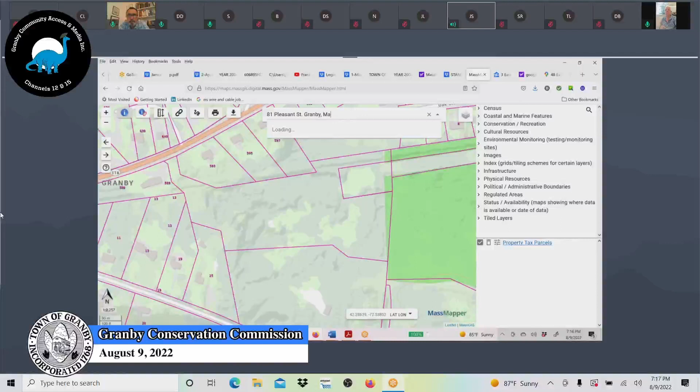Is there a plan that has been submitted to the building inspector that we could look at to make sure it's the same as what we were looking at before? Come on, is there a plan? I'm not sure if he has one or not. I have one in the truck, the site plan that I showed you.

Yeah, I think there was a construction, there was an architectural concept plan for the garage. But I didn't see any site plan of any consequence. Come on, well, this is here, yeah, basically. That's fine, that's fine, Dave. That's fine, okay. Yeah. No.

So Alan has an architectural site plan in his truck. I've seen it, it's pretty limited as far as there's no topography shown on it. It does show the building, does show a schematic of sort of a gravelly parking area, sort of a circle, and a swale that really aren't detailed, but again, it's from an architect. So that's the piece. More than willing to bring that in to let the commission look at it, but I don't know if that would answer Dave's questions.

There's no wetlands shown on this plan. Yeah, I'm trusting Dave and Amanda want to see a little more detailed site plan or site sketch. Is that not true, Amanda? Yeah.

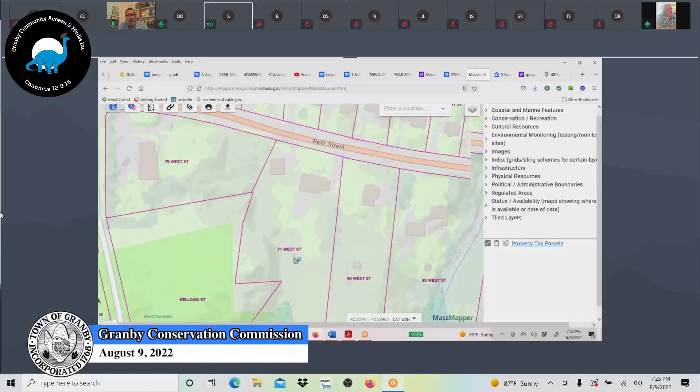I feel like it's a no-brainer because it's a repair. But it is our jurisdiction. I would argue based on 1003-3 that it wouldn't even require an RDA.

I would be willing to let this one go without a permit because it's presumptively approved through the wetlands reg, via Title 5 reg. That's my feeling on this. But if you guys want to have them go through an RDA process, that would be fine. But I call your attention to 1003 paragraph 3, presumptions regarding Title 5 designed leach fields.

But that's the purpose of the RDA, that they would just bring that to us so that we didn't do this twice. You know what I mean? Like they should have just had an RDA to begin with. Well, you can make that argument. Bob, would you be good to do an RDA on this?

Actually, I would not be, unfortunately. The property owner, as I understand it, is going to have difficulty affording the expense to install this as it is. Ward Smith, my understanding, is out like 3 months to do an RDA. There's virtually, I was asked today by another engineer, who can we get to do wetlands? And the bucket is empty.

So we were hoping to get this in with the understanding that it is greater than 50 feet, as Title V states. Granby supersedes that by saying 100 feet from wetlands. That's for new construction. Dave, do you have access to Bob's septic design in a PDF format that you can put up on the screen, please?

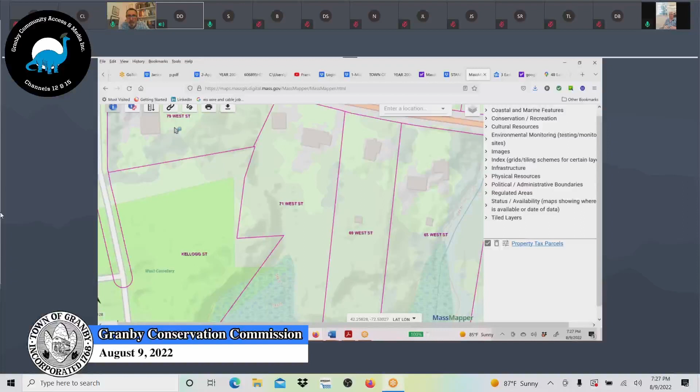Oh, no, I don't, Bill. Has that been pushed out? Bob, have you sent it? I sent that to Kathy on Tuesday evening last week, or Wednesday morning. All right, let me look. We'll have to do a search then.

The RDA form is so simple that applicants should be able to fill those out themselves. They literally just have to say that it's 53 feet off the wetland, it's replacement. It's more that it should have been done beforehand, because it is silly to have you guys come back.

Well, let me ask you this, Amanda. Would you be willing to let the RDA go through without a plan and map of the site? I would just use a GIS map and draw over it, because I could throw it together right now. The only thing about RDAs is that there's the public notification requirement.

Well, see, that's the point. That's a month delay right there. But ideally, maybe we could let this one slide, I guess, but ideally we would want people to just do the process in the first place. Well, why don't we get Bob's septic design up on screen so everybody can see it.

I don't have it. All right, I think I might have it in my Board of Health file, so just give me a minute. Maybe I can find that and send it to you, so just stand by. I need about 5 computers.

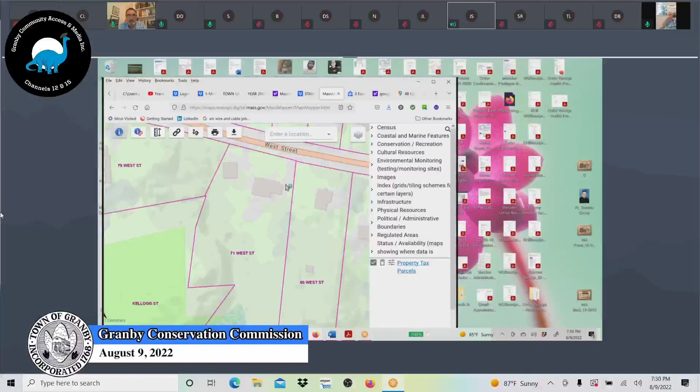Yeah, but again, I'm trying to. Bob, could you send me that plan electronically right now? Is that possible? Yeah, Bill, what's your email? Just send it to my private one. It's n1cq@comcast.net. N1CQ, yeah, at Comcast, yes, .net. And then once I get that, I'll send it to Dave and Dave can put it up on the screen.

Okay, it's on its way. Okay, thank you. Okay, excellent, Bob, thank you. I'm gonna send this to Dave now.

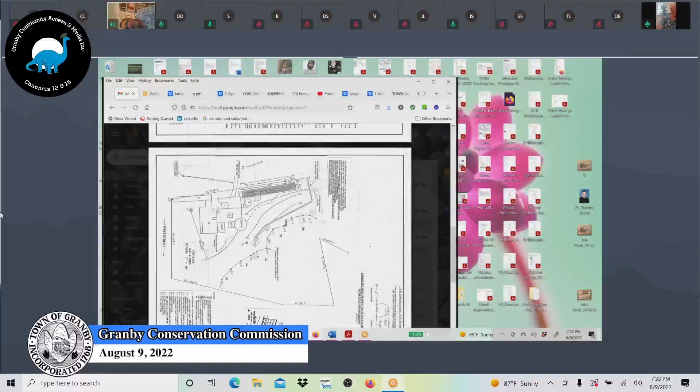And as I had explained at the Board of Health meeting, we've got an iron pipe property pin right at the property line where the leaching facility is going.

In fact, if you look at this design, there's absolutely no other location for it, because if you shift it to the north, then you're encroaching on the well. So you don't want to encroach on the well. And again, you can't go any further to the west because that reduces the separation off the wetland. And if you go to the east, you're on the neighbor's land. So you're kind of boxed in there.

Yeah, honestly, this plan would have been perfect to go with the RDA. But I mean, yeah, whatever we do, I think it's fine.

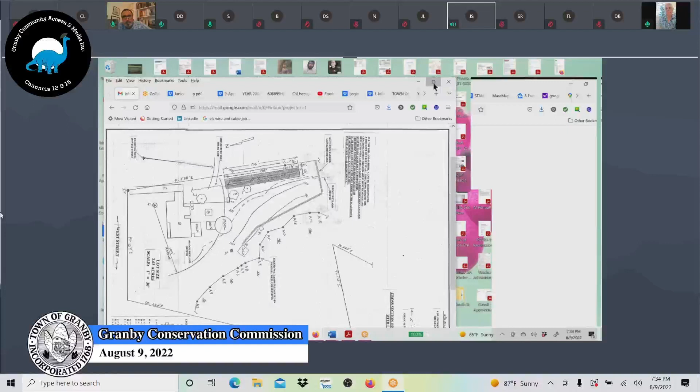It makes sense. Now, Janice, based on your reading of that exception, does it or does it not necessarily require an RDA to accompany that? I don't think it actually says, other than it says that the presumption is considered overcome. The setback distance isn't necessary if it's an older system prior to the effective date of the regs, and there's no alternative location.

Well, again, my personal opinion is I think there's nothing to be gained by doing a formal RDA except getting a $150 fee from the applicant and taking another 30 days to get this accomplished. So, with due respect to what Amanda's saying, which is totally correct, but I think given this scenario, I think it might not be a bad idea to simply approve as Bob has submitted this.

Is that a motion, Bill? It is. Is there a second? Dave will second. Discussion? All in favor, I guess? Aye. Opposed?

All right, so we get a permit for the septic system. Bob, you're all set. Bill, do you want to relay that information to whoever's in charge of that? I don't know if the building inspector's in charge of that.

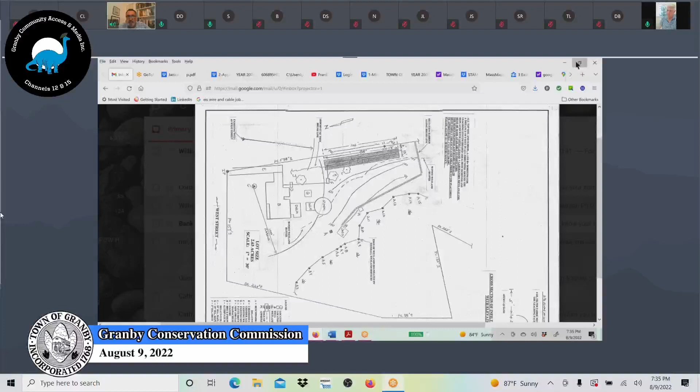Yeah, I'll do so. Again, I don't like to have to do this at this rapid a pace, but again, there's really no other option on this particular site. I think, Janice, write a little note to yourself to do a little further research on the protocol for handling this particular presumption. All right, we're up on 7:30.

Okay. This is Bob Sheehan. I just want to say thank you very much to the commission. I appreciate it, as well as I'm sure once I communicate with the property owner, they will greatly appreciate what you've done. I appreciate it.

Thank you. Give Mr. Scully your best. Thank you. Thank you very much. Good night, all. Bye-bye.

Before we start the public hearings, Mr. Blanchard from 591 Amherst Road came back with his septic plan, I believe. Did you want to hear, look at it real quick? I don't know if there's any issues with this or if this can go fairly quickly. Are we willing to see it, or do you want to go to the public hearings? Are we gonna see it though, Ed? Yes, he brought, he's got a copy here. I can flip the camera around if we get this done in 2 minutes, I guess. See what we're looking at.

I really can't see it. Do you see that, guys? Could you get rid of your screen share so the images show up larger on our screens? Yep, close your screen share if you would.

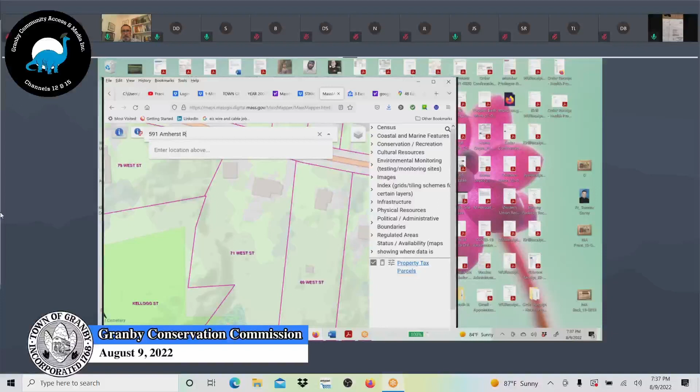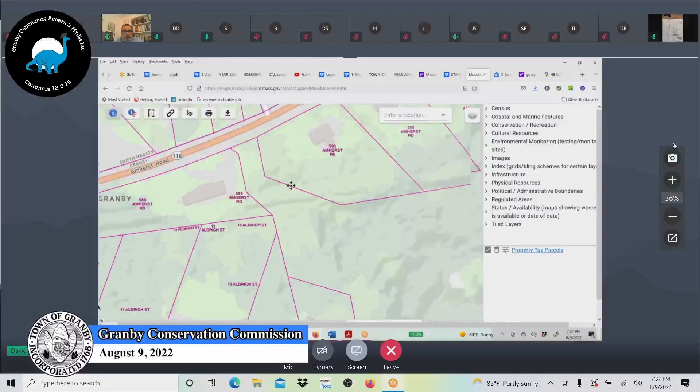Is that what you're looking for, Bill? I'm actually looking for Ed's plan as well. Ed, could you have this gentleman email us that plan? We can't do it over the phone. I'm not seeing an image large enough to even comment on. I think we're gonna have to go through a more normal process. Have him prepare a submission package for next month, please.

You want to hang around till after the public hearings? He can email it to you, Bill, and you can send it out. Janice, could you take care of that? Let Janice handle the logistics on this, please, in terms of getting a copy of the plan. Coordinate with this landowner to get all his documents in order before we start looking at things. Thank you. Do you have his, Janice's, email?

Kevin will get you that information. Okay, Amanda, let's go to public hearings, please.

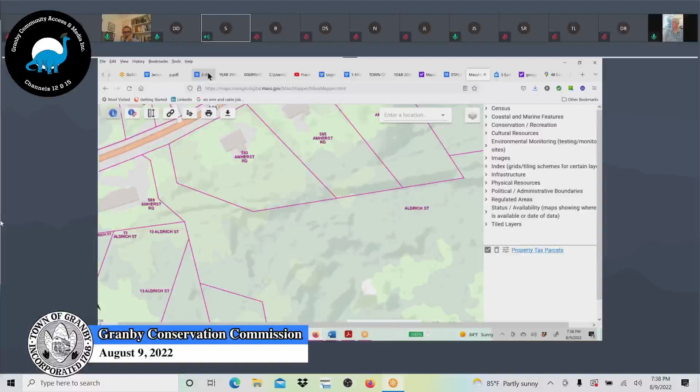So our first hearing scheduled for 7:30 is NOI GCC 2207 number 165-0356, filed by Patricia Leavenworth for Mass DOT, for the proposed Route 202 project intersection improvements at Five Corners and School Street Roundabout, located in the town of Granby.

Patricia, are you here? Do we have a representative from Mass DOT here? So do you, I guess? Mr. Notario, would you be presenting? Nathan?

All right, we're getting some feedback on my end. What I would recommend, Ed, is if there's more than one person there, please have everybody mute their microphone except the person talking, otherwise we're gonna get feedback. So if Bob Notario is going to present, then Ed and everybody else should mute their mic.

Okay, now I don't hear anybody. I think that's Bob Notario. Bob, is that you? We're still getting feedback now. Maybe if Bob uses Ed's device, it was performing pretty well, maybe Bob could just use Ed's device to transmit. Can Bob share his screen? No, he's not going to share his screen.

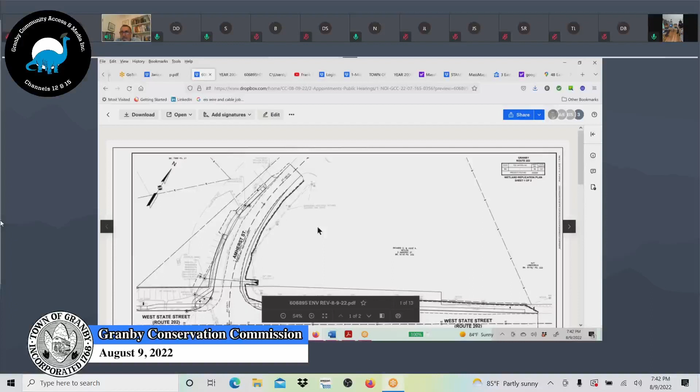I think the key one for wetlands is going to be the 6 or 7 digit number that says ENV revised, I think that's the key one for us. Should I open it now? Yeah, sure. That's it, that's it. Okay, Bob. All right, how's the audio coming in? Perfect, loud and clear.

All right, thanks for having us. My name is Robert Notario from Mass DOT. I'm here with Ethan Minot, one of the designers on the project. We've been talking about this for a while, but we finally arrived at the notice of intent, so thank you very much. I was going to start off this evening with just some basic bulleted points of the resource areas, if that's okay with the commission. Bob, why don't we go back a couple steps and outline it. Up on the screen you'll see what the two projects are, the Five Corners intersection project, and if you look at the very bottom of the plan on the left side of the plan sheet, that's where Cumberland Farms is.

So the wetlands and resource areas in the vicinity of the Five Corners intersection are in the general area. There's a stream to the west of that intersection and a stream to the south, both of which meet Stony Brook, approximately 2,300 feet to the west.

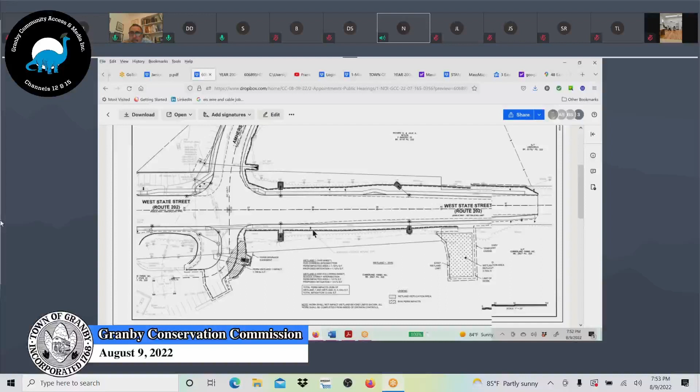Right, so our stormwater outlet - it isn't a direct outlet to the stream or brook, and we're actually pulling it back a few feet. Is that correct? Yeah. So the outlet is on the north side of Route 202, which is the pond side, and the water is flowing north. So if you followed a raindrop and it fell on the roundabout, it discharges out as water flow out our outlet, flowing into the pond side or north side of Route 202, not into the actual flow or stream channel of the brook, which is a cold water fishery resource.

Is it 1 CFS with a 100-year storm? Is it 10 CFS? Is it 0.1 CFS? What's the order of magnitude of the peak flow rate? I don't know the number off the top of my head, but I will get you that number. Again, we are pulling that outlet back several feet - we're going to have stone pipe ends at the outlet there. I'm trying to look at it from increasing the distance between that outlet and the resource area, which would be the pond side, not the brook. And you can see it if you want to look on the plans.

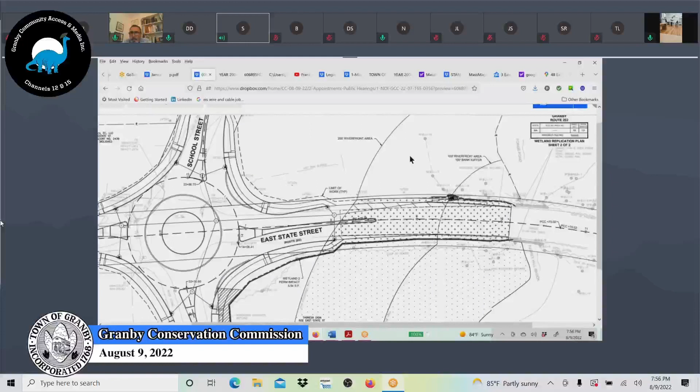I have basic responses to the DEP comments. My intent for the first meeting was to meet live in person and online and discuss the comments as we go. I was fully anticipating having at least a couple of meetings with the commission and a site visit. I'm not trying to rush through and just close out all the comments in one fell swoop.

I'm under the approach that everyone's got an opinion, and I'd like to incorporate as much thought process and get back as much detailed information as I could. I do have responses to those comments, which we can go over depending on what time you have in your agenda. I didn't want to assume how much time we had. And again, I knew we were going to be meeting a couple of times at least. So our approach was to holistically have a healthy discussion with those comments, which I think are pretty well thought out.

I'm glad you're not looking to close it tonight, but I would also be happy to see how DEP responds and if they're satisfied with your responses. I've worked on a couple of their Mass DOT projects and they have been very focused lately on getting all the stormwater stuff right, really nitpicking projects to make sure they're very compliant. So I would love to see their responses when we get there.

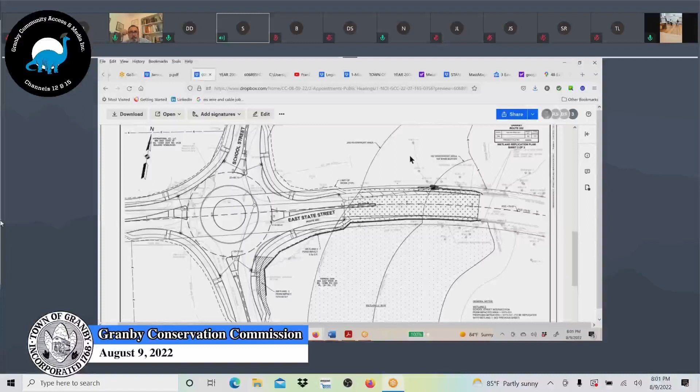and forward us the response by email? Yeah, let's do that. Is that what we're asking for, Amanda? I think that sounds good. I would also like to see the page for the wetland replication, if you have the planting plans and stuff. I don't think that was included in our package. Do you have a forest plan? That's not in this package? The restoration, I didn't see it. We have a planting plan we can share for the wetland replication area.

We also have a basic planting plan for the roundabout. We can't get too crazy in there because it's something we'll have to maintain as well, but we do have planting laid out. We have a certified landscape architect, Andy Schlenker, who's working with us on this project, and he'll be working with us all the way through construction. Bob, are any of these plans in our package that we have currently?

I don't think so. I think it said it was page 64 or something, in one of the notes. That's okay, I don't need it tonight. I don't see it. One good point, if I could, please - who's going to maintain the interior circle of the roundabout? We have them with us here. I can pull them up on the screen, I can email them, I can do pretty much whatever you want.

So Bill, I think I didn't hear your question. You said something about who's maintaining the roundabout plantings. I would imagine that's Mass Highway. This is the classic dilemma with roundabouts - who's going to maintain the interior surface, or are you going to simply pave it? It's Mass Highway District 2's problem. That's their maintenance, that's not Granby DPW. That's going to be Mass Highway.

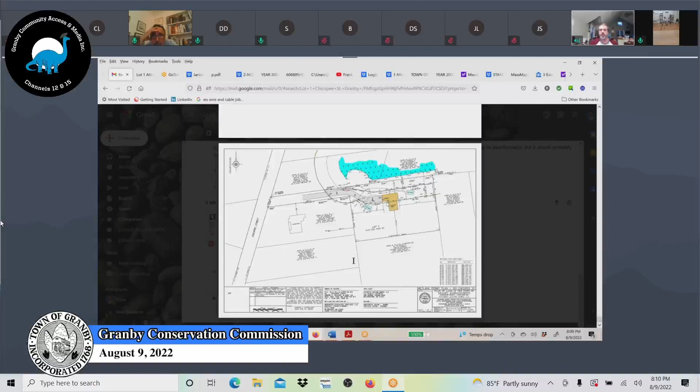Hope the thing's gonna be, oh good, there we go. Yeah, so that blue area up there, that's the wetland located off-site to the north. It's about 10, 11 feet lower in elevation than the site. The site itself is pretty flat.

Due to the configuration of the lot, the driveway kind of has to go through the buffer zone. There's really no way around it to get into the site. So we have the driveway coming in center of the right of way and then swinging out of the buffer zone as soon as we can to get to the house.

We're proposing similar rain garden swales along the edges of the driveway like we did at Maximilian. This time we're putting them on both sides. One will catch the driveway runoff - the driveway will be pitched away from the wetland and then through a vegetated swale into a rain garden. On the north side of the house, we have a similar setup along the new tree line, which would catch roof runoff or yard runoff, putting that into a swale and infiltrating it in a rain garden right there.

The clearing would be 50 feet from the wetland, other than a small area where the driveway doesn't really have any way to get out of the 50-foot buffer, where that red hatching is. That would be a little bit of clearing inside the 50-foot, just for the corner where the driveway is. But we looked at that area in the field - there's really no trees there, just maybe a couple small pines, but no substantial trees right there.

Erosion control, we obviously put along the backside to catch anything. I figured we could talk about tonight what that erosion control could be. We were thinking of using the same wood chip berms, or wood grinding berms I should say - they're not actually chips, they perform better than chips. Steve, put that as an erosion control question.

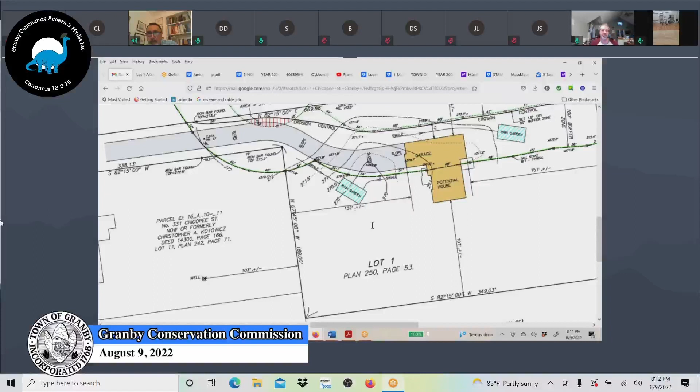So your wetland flag 13 has an elevation of 261.8, call it 262. Are your wetland flags more or less at the same elevation? Pretty much, yeah, total slope. So you're going from 272 to 262, a 10-foot elevation drop in 50 feet. That's pretty much perfectly flat, and then it drops straight down to the wetland.

So where's the break in the slope occur? If you pan the sheet closer to the wetland. Could you unzoom a little bit, please? Where that wetland line is very straight between wetland 7 and 11, the drop off is probably 5 feet back from that. The drop off's not on Mr. Kotowicz's lot. So when you cross the property line, there's an escarpment, a real steep slope at that point.

So the rain garden, are you going to utilize that for the gutters from the house for discharge? I don't think we were proposing that directly. Whatever came off the house would get into that swale and into the rain garden. I got you, that's good. Looks like a good design to me.

Any other comments from anybody else? I had one question looking at this plan. I know this isn't an architectural plan, but the driveway right now is drawn like it's 20 feet wide. Is that actually the width of the paved driveway or the driveway itself? That's what's shown. I don't know ultimately what would get built.

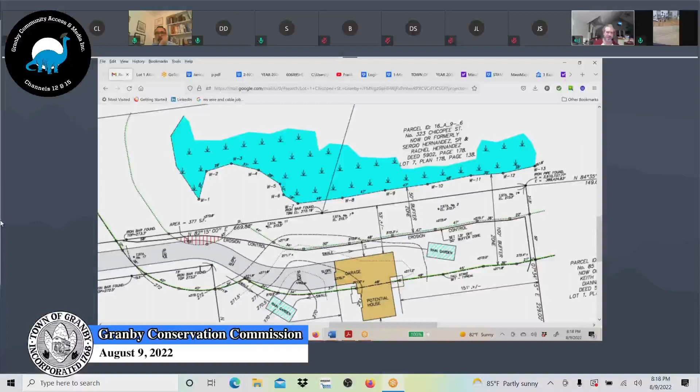Fairly common. Some of the towns that have bylaws have that written into them. I don't know the exact percentage, I'd say usually 15-20% of them that have bylaws have some level of a no-disturb zone, but then they have a variance to get out of it, you have to explain why, but there's a way that you can approve it. By and large, people try to get out of there if at all possible.

Yeah, that's something we might want to consider for future reference. And again, given the fact that there's a variance protocol, it's not going to be a steadfast deal killer for anybody, but I think it's a good protocol for us to at least consider. Thank you, Steve. No problem.

Okay, anyone else? Oh sorry, I was just going to say one of the things to discuss before we end it all is what Steve mentioned about getting approval to use that sort of wood shredding mulch instead of the usual erosion control, just to have that be part of the decision or discussion.

Now, getting back to the driveway, when we write up the specials on this, do you want to limit the width of the driveway so many feet from the house? I realize you want it the width of the garage, but then you'll neck it down, and maybe Alan wants to put in a hammerhead turnaround for the owner. But do you want to limit the absolute width of the driveway for the majority of the driveway going to the street, or permit him to go with a 20 or 25 footer if he wishes?

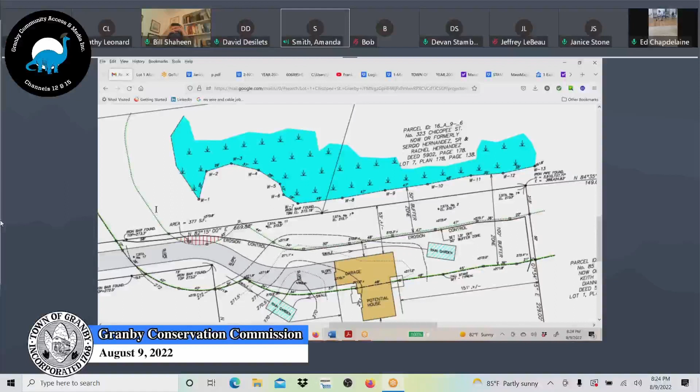Amanda? Yes. Next item, 48 East Street. Yes, so this doesn't have a file number. Is that correct? On the Stamborski one, it does have a number, DEP number 164-0355, filed by Devan Stamborski for the proposed new house and driveway within buffer zone and driveway wetland crossing, with regards to property located at Lot 1 adjacent to 48 East Street and known as Map 5B4 in the town of Granby.

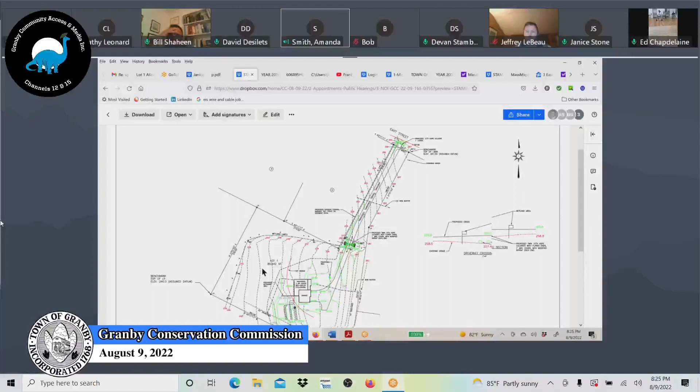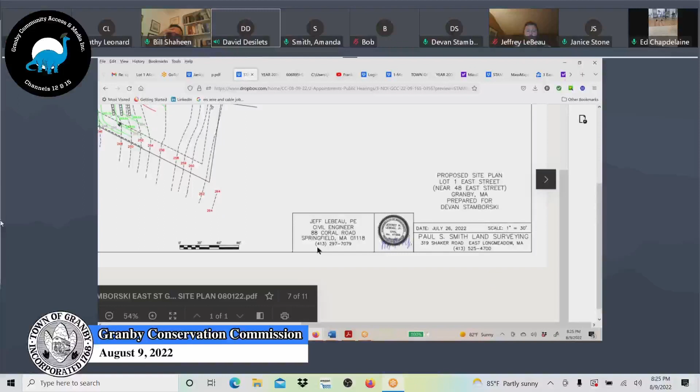Everybody see that okay? I see it. Dave, who's the surveyor and engineer of record, please? It's right here, there are people I really don't know. The civil engineer is Jeff Lebeau from Springfield. And the surveyor is Paul Smith Land Surveying from East Longmeadow. Oh okay, he's been around. Ed, you know Paul Smith, don't you, Ed?

Yeah, I do. Okay, you have a full-size plan? I can't read the reduced copy. I know we have a PDF on screen, but we don't have a full-size drawing in the folder. My eyesight is not good. This is one of the LaFlamme properties that they're selling on East Street.

It's the estate lot right next to 48 East Street, which is a site that Janice and I looked at a while back. They were putting in a swimming pool, I think, Janice. Yeah, and if you remember, it was springtime, and there was a spring. It looked like it was draining an upland wetland. And that's what this culvert is, at the driveway, just at the top of the plan that you can see. So I think you did a very good analysis for them.

I don't know, well, Devan is in the room, so maybe we should let him talk. Yeah, let the applicants present their case. Is this an NOI or an RDA? NOI. Okay, so Devan and Jeff, go ahead please.

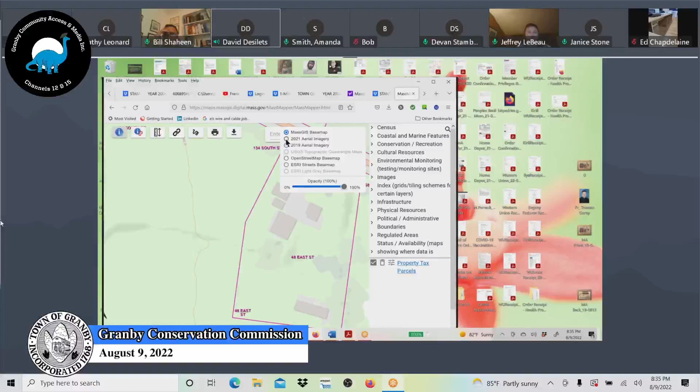That would be good. You could share your screen. Do you have it? I think you have to make me the presenter. It's whoever has the power has to share it.

Yeah, the thing is, I don't know if Kathy lets us bounce the share. She privileges it back and forth, but I lost it before. I gave it to a consultant one time and then they left and we lost it.

Okay, well, Dave, if you could hand that off to Amanda, that would be terrific. I'd love to. So Amanda, or Bill, I have two residents who are direct abutters that are here.

They're here to listen to the presentation. Okay, so after the commission's done, if they have any questions, we can ask them, but we'll let the commission finish or continue the presentation.

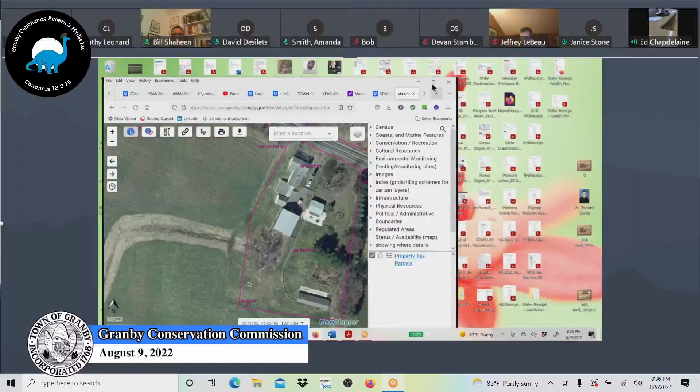All right, this photograph that's on right now is a very, very insightful photograph. There's the ditch, there's the drainage ditch right there. Yes. The concern I would have would be backwater to number 48. You don't want to create a backwater situation.

So it's really important that you design any embankment, Jeff, any embankment for the roadway, even outside of the twin culverts, that embankment should be able to pass water without impeding the flow of water.

Correct. Here's a question: what's the cross-sectional height of your driveway embankment going from the street to the twin culvert crossing? What's the nominal height of the embankment going to be?

I'd say about 1.5 feet, but at the crossing it's going to be close to 3 feet because I wanted enough cover over the pipes.

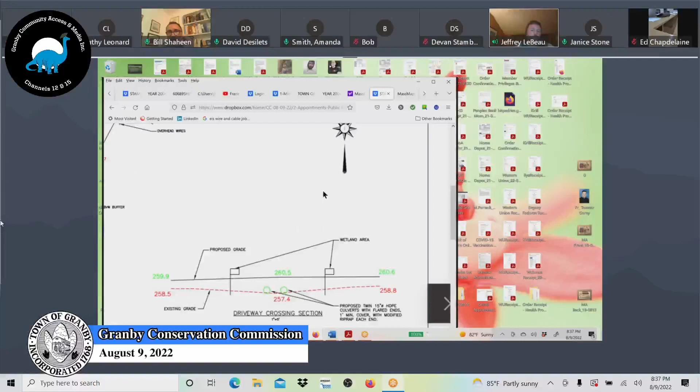Yeah, if you pan over. So if you look, it is at a scale, so 15-inch, and then it's about 1.5 feet of cover over that.

The concern I would have for the abutter is if you've got 1.5 feet of embankment between the street and the double culvert, and there's backwater, a huge rainstorm, and there's backwater against that embankment, conceivably you...

...could raise the local water table a little bit and cause some upgradient flooding. So you've got to be really careful for that. So you might want to even consider putting in some equalization pipes every few feet. You see what I'm driving at? You see the point? I do.

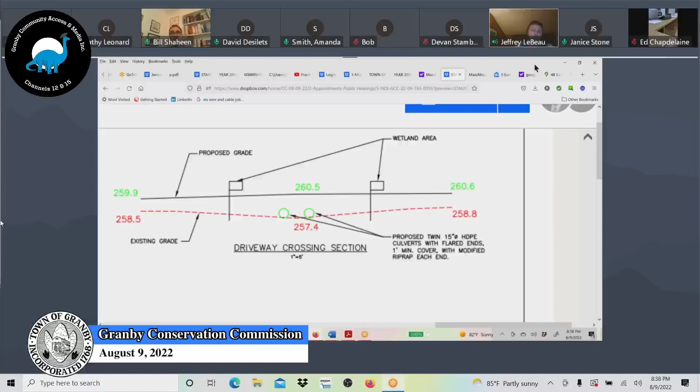Yeah, actually, can you just go back to the grading plan? I just want to see the extents of where there would be an embankment, because I think it matches grade very quickly north of the crossing. Right next to it.

Can you see the property line? Again, it'd probably be nice to see a cross section every 50 feet along this driveway, given the criticality of this, but let's just see what you have to start with anyway.

I can take another look at that. Yeah, please, if you would, because we don't want to cause any upgradient flooding.

If the commission would remember the project on East Street where the culverts were put in, it backed up the water into that guy's orchard. I don't know if you remember, going into Ludlow - this potentially could be the same thing, especially as we keep taking these farm fields out of agricultural use and converting them to different uses. I've seen this happen more than once, believe me. It's everywhere.

Now, Amanda, do you have control of the system now? No. But I mean, you could see it before.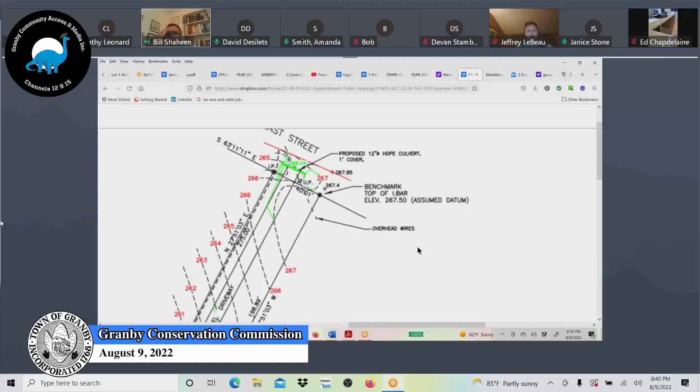Okay, again, until we can get this ironed out. Any other questions from any other commissioners going forward, or Janice?

I had a bunch of questions, but just as soon have the commissioners ask things first. Okay, Amanda, any other questions? I do not. No. Okay, Dave? None for me, Bill. Okay, but Ed? I don't have any particular now.

We have an abutter who's listening in. I'm not sure if they want to ask questions, but we'll let the commission end first and then Janice with some comments, and then we'll open it up to the audience. Yeah, let's do it. Kevin, are you there? Yes. Any questions? Kev, any questions on your end? No questions. Okay, so Janice, why don't you opine and then we'll turn it over to the floor.

Okay, so I would like to plan a site visit here, and so we need to make sure that the flags are there as well before the commission goes out.

And I also had a lot of problems trying to, even at blowing up the map, it's really difficult to read this to me. I'd like to have it at a larger scale so that things are clearer.

Yeah, we can print a couple hard copies and get those delivered to you. That's not a problem. You know, Ed, one thing - in the Carnegie Hall there's that 54-inch or 72-inch monitor on the wall that's Bluetooth accessible. You can Bluetooth over to that and put the image on that big monitor if you'd like.

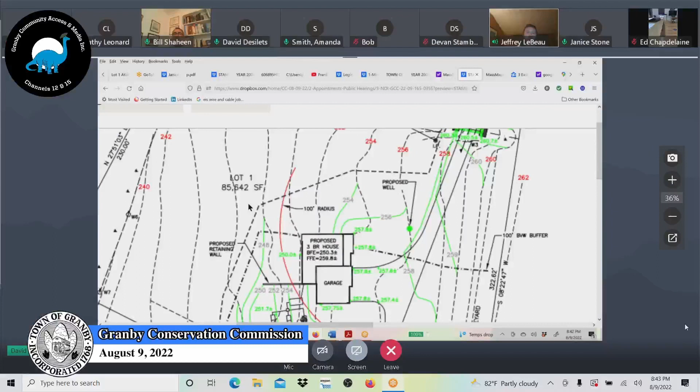Yeah, we show silt fence along the edge as well. To the left, if you go further, see where it says 100-foot radius, the red arc - that other dashed line is proposed erosion control fencing, whether it's a silt sock or sediment control, whatever the town prefers, silt fence.

Why doesn't that go to the north further too? It goes the whole length of the project - goes the whole length of the project on the south side, down gradient. See, proposed erosion control barrier, silt fence, or sediment sock.

Oh, okay, I thought you said it was the red line. I couldn't figure out why that red line stopped. No, that was the arc. I think the red line is the 100-foot well arc for well protection. Correct. Okay, correct. Yeah, okay.

Especially when blown up, you can see things, but you've got dash lines for contours and dash lines for the erosion control barrier. It's a little confusing. The colors aren't very helpful either because they're just not very sharp.

At any rate, I definitely feel we need a larger version. And as we were talking about, you need to do a 1-to-1 replacement of the wetlands that will be lost, so you need to show where and how you're going to do that, including the plantings. Ideally it'd be nice to have that area identified before we do a site visit so we can look at it at the same time, if you can figure that out.

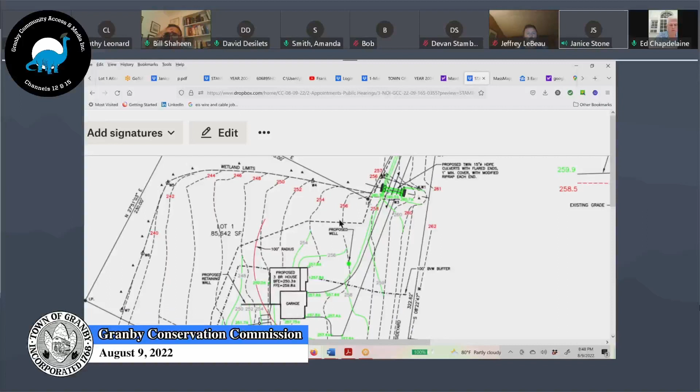So you'd have to go to Laflamme - Laflamme would have to agree to do this. Laflamme would have to be notified that this was being requested, but I don't think they're only asking for the property that they now own, so I don't think they have any... let me ask a question to Devan and Jeff.

Devan, do you own this project in fee, or is it a pending transaction at this time? I own the property. So he owns the property, Ed, so he'd have to go back to Laflamme and ask him to initiate the COC.

Sure, no, I don't see the problem. We can still work through this concurrently, I guess. Okay, yeah, again, we'll get you done. You don't want to cause any banking problem for a remortgage or something down the line. That's the problem, yeah, I hear you. Yeah, okay, all right, just-

Okay, so then wetland replication design, and then there was a question about whether there was an intermittent stream and therefore bank alteration. The email I'd sent to Devan was just that that's probably something the commission can determine when they do a site visit, or how do you guys want to handle that?

Well, let me turn it to Amanda. Amanda, you've dealt with a lot of these farm fields in Framingham. So the question is, in your opinion, is this waterway simply a BVW style waterway, or is it an intermittent stream which might require stream crossing standards?

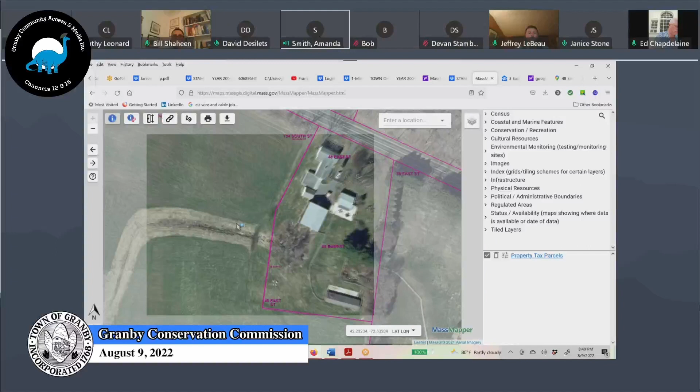Okay, Janice, were you looking at the questions or photos? No, I think the key thing is the wetland replication or replacement, as well as making sure that there's no backup from the fill for the driveway crossing. That's right.

Okay, any other questions on anybody's end on the commission? None heard. Ed, I think you have a guest in the Carnegie Hall. Sure, they were satisfied with the commissioners' discussion points. They had nothing to say about the project, whether they're for or against it. They thanked us and they left. They're direct abutter to the east. Okay, so all right, okay, they voiced no concerns to me or Kevin.

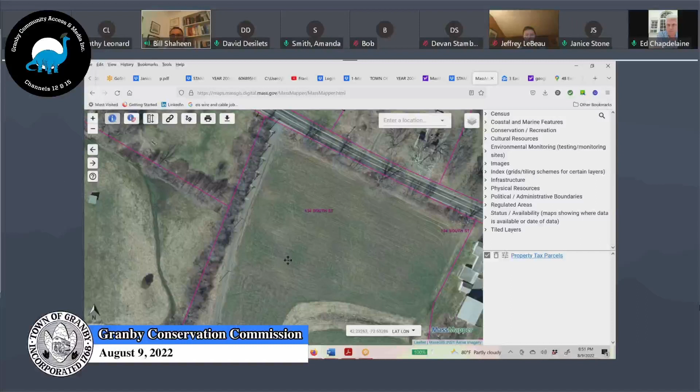Okay, so they were satisfied. So why don't we just reiterate the concerns and the workup plan for Jeff going forward. First of all, we're going to do a site visit. Janice, when do you want to do this? In the next week or a couple of weeks out?

The sooner the better, as long as the flagging is there, and if you want them to try to come up with a place for the wetland replication or not before the site visit. Okay, Jeff, would you be able to work on that, please? Absolutely. Yep, okay. And again, I'm concerned about the embankment and the ability of it to act as a dam.

So yeah, if you could do some, maybe every 50 feet, do a cross section and think about putting equalization pipes in maybe every 100 feet or something like that.

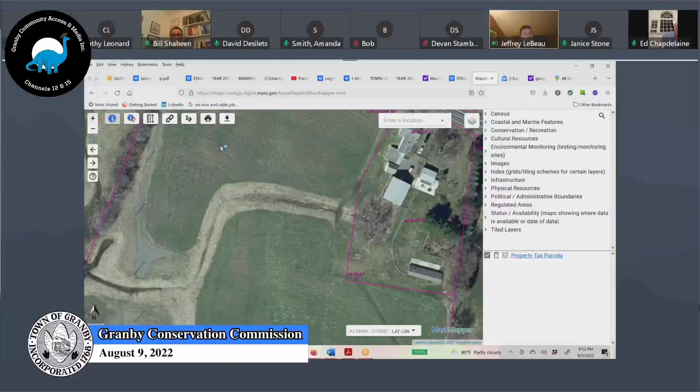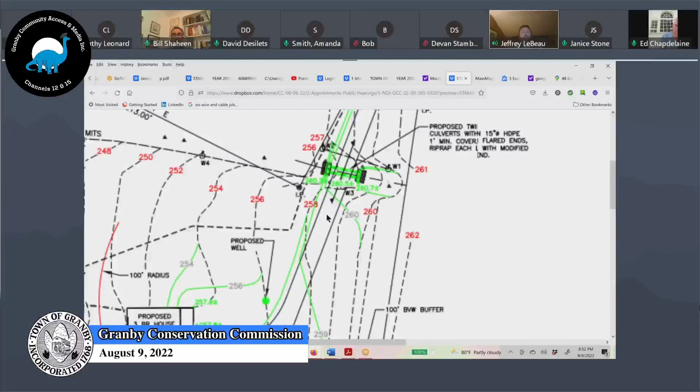Well, not to cut it short, but if we look back at the grading plan—I didn't know when you first asked me the question—but if you look north of the crossing, there's very little, if no embankment. If you zoom in and pan and scan up and down, I tried to match the existing slope on the uphill side. It's basically, we're just using a 2% cross slope as we come across. So the real impoundment area, if you will, is really isolated to probably 20 feet either side of the culvert pipes.

Okay, so if I have to add a third one in, then that's easy to do. Okay, but I will look closer at it. I just don't think we need cross sections every 50 feet now that I'm looking at it again. Oh, yeah, again, if you were building a big embankment, you would need periodic sections, but if you're not building an embankment, it's a moot point. Okay, good, I totally agree, but it's a great question. Good, thank you. You're welcome.

Okay, folks, so what else do we need Devan to work on and Jeff to work on? Did you want to have a peer review, or do you want to wait until we go out and take a look and see how we feel about it?

Yeah, why don't we let's do a walk around on our own. If we feel comfortable on the call ourselves, fine. If not, maybe we can bring someone like Emily in. Yeah, that was my thought too. Ideally, I would want to be able to get out there and get an auger in the ground, just take a look at the soils.

And it depends on the timing for the applicants, on if they're in a hurry and would rather we just tee up a peer review to guarantee it, or if they want to wait and see if we can cover it with commission only.

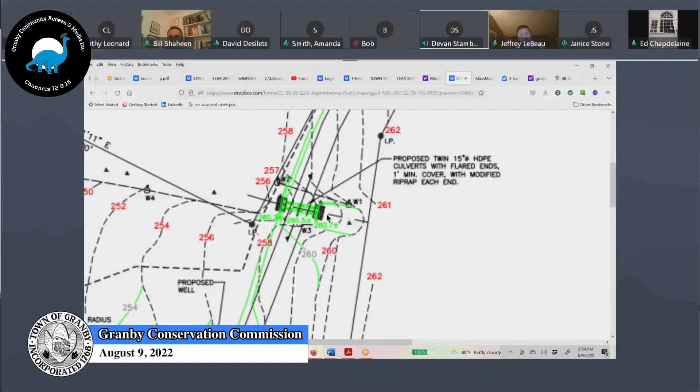Jeff, did Kevin prepare any data sheets at all, or none? I think when Devan asked him for them... I don't know, Devan, what answer did you get? In short, he said no, there's no paperwork involved. I've been trying to get a hold of him and he hasn't called me back.

I think, Devan, that call's going to be up to you. I know what hydric soils look like and modeling, obviously, but we could go out with the commission and put some shovels in and augers and look. I don't want to delay the project with a peer review, but I defer to you and the commission as the best course of action on that determination.

Did Kevin say he delineated via hydric soils, or simply vegetation? I believe vegetation, but the phone call was about early May. I can't recall exactly.

Again, I've been around for a while. My expertise is not in wetland science. However, I've learned over 40 years in the business that with wet meadows, you've got to look at hydric soils anyway, for what that's worth. But again, let's go out and take a walk around. Maybe it's a lot simpler than we think.

Okay, very good, guys, thank you for being candid. Would you like to coordinate that with us, or are you guys going to do that on your own?

Janice, you're going to coordinate the site visit with Jeff and Devan, correct? Yes, but I'd like to know what works for people in terms of, do you want a Saturday morning? So is that better for people, or not?

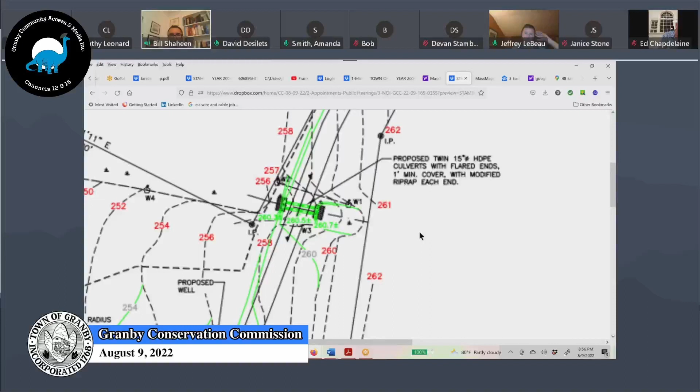Okay, Amanda, what's next on the hit parade? All right, let me see. Up next we have the NOI.

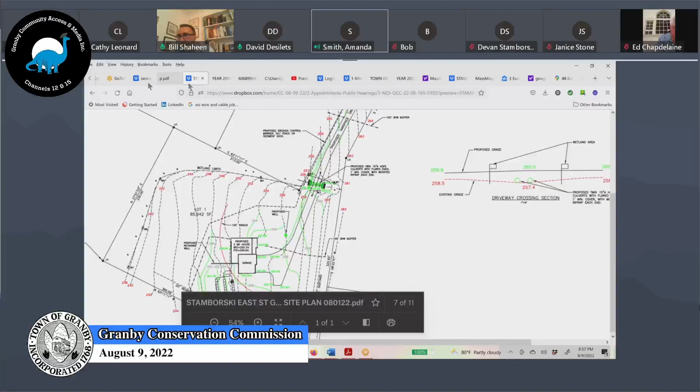165-0352, which was continued, previously filed by Christopher Aldrich for proposed demolition of a barn located on the bank of Bachelor Brook. Prior to demolition, sediment and erosion controls will be installed. All debris will be removed from the site, with the exception of the stone foundation, which will be brought down to grade and left on site. This is with regards to property located at 49 Aldrich Street, known as map 1C8 in the town of Granby.

And do we have someone here for this project? Is John Jeffress here? Is Kit Aldrich here? Okay, the last I've heard, folks, on this is they're in the process of retaining a soils engineer to write an opinion paper or opinion analysis on some slope stability issues, and that's where it stands.

So I move that we push this till 13 September as well. I second. Any further discussion? Hearing none. Okay, is everyone in favor? All in favor. Aye. Aye. Okay, cool.

So we'll see these guys in September. Yes, it's another continuation. This is for an ANRAD.

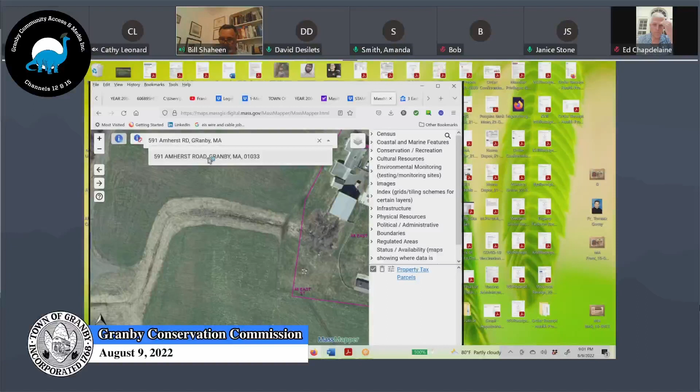Yeah, I'm giving it a look on the historic aerials. The plans I just quickly looked at don't really give location, so I don't know where it is on the property. It's hard to know where to look for wetlands.

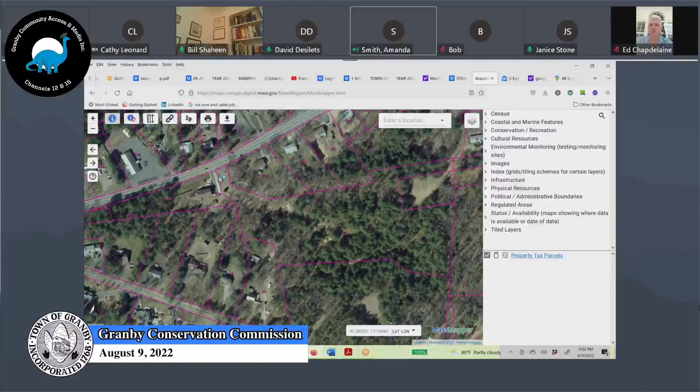Well, you can kind of see the driveway, and then it looks like there's some cars parked in the middle section, like a white car. Nope, further left, you're getting close, to the right, a little bit down. It's so frustrating. Okay, so I see the white car, so it looks like it's probably right in the middle of that lot where they're thinking of the house. Oh, over here. Yeah.

Is there a plan that we can look at? Who has it? I don't have it, I just got it. Like I said, it doesn't really give location. I can send it on to somebody. Send it to me, Amanda, Janice. Okay.

Just like a hot potato, you know. Okay, I just sent it. You did? I did. Let me go back to it again. Hit it one more time. Maybe it's slow. Oh, my phone.

It's not from Bill Shaheen, right? No, it's from Granby ConCom. Okay, let me find my way back to my thing. I'll just do it again. Oh, here we go, I got it. Great, thanks Dave, thank you.

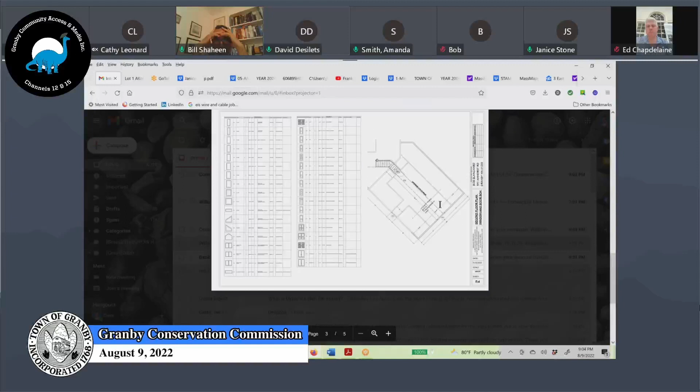Loading now, it's 5 pages. That's the house, okay, nice plan. There's no location. Yeah, we don't need the window schedule, we want to know where it is on the property. This is not helpful for what we're looking for. These are only plans of the house. We need a site plan.

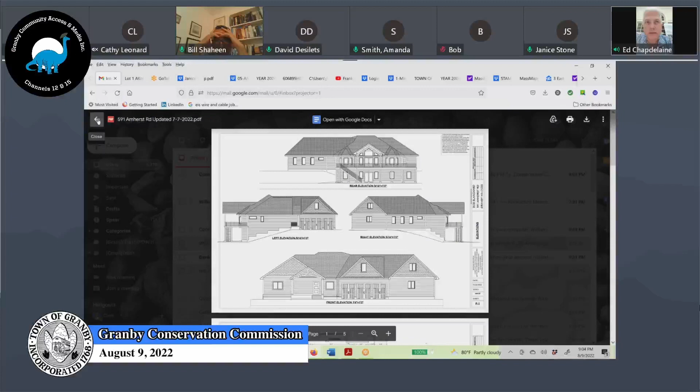It should be another one that's from the applicant, named Plot, 591 Amherst Road Plot. It's gonna be a separate email. I'll forward those, that one should have the location of the building. Okay, good. It looks like he sent the septic one too. Yes, I think that's more than enough right there.

Sorry, I didn't know I needed. That's okay, sorry you're late. There you go, that's it. Okay, right, that's a little better.

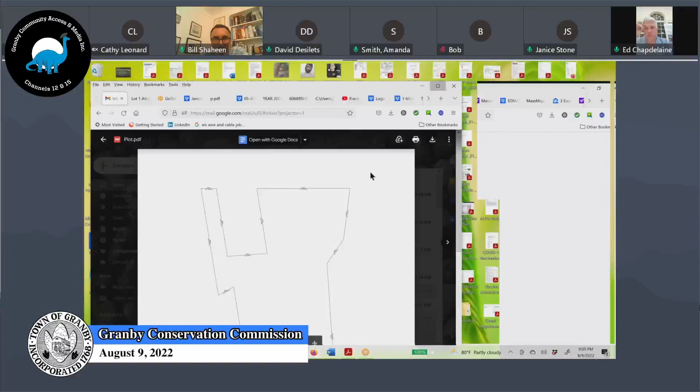Use the one that says Plot, that should be the one that has the building on it. The other one is probably the record plan, it says survey. There you go, scroll out. All right, there's the house, there's the road. Bottom of the page would be the road.

Okay, so if somebody can eyeball the aerial photographs and the wetland maps with respect to this sketch, just to see if we're in the clear, as Ed has suggested. I think it is. I'm doing my darndest to see if there's anything that looks at all suspicious, and it seems very high and very dry. It was right next to an old gravel pit, yeah, a gravel area.

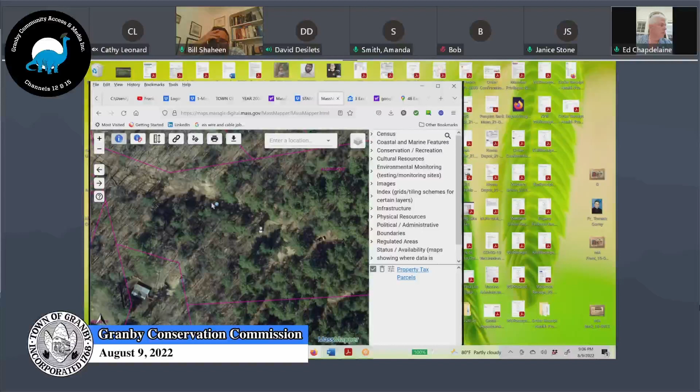It's in this general area where all the trees are. I can't find any historic records of it being wet. Ed, do you have access to elevation data on Google Earth for this? No, the MassMapper might have it, but remember the elevation up there is pretty high.

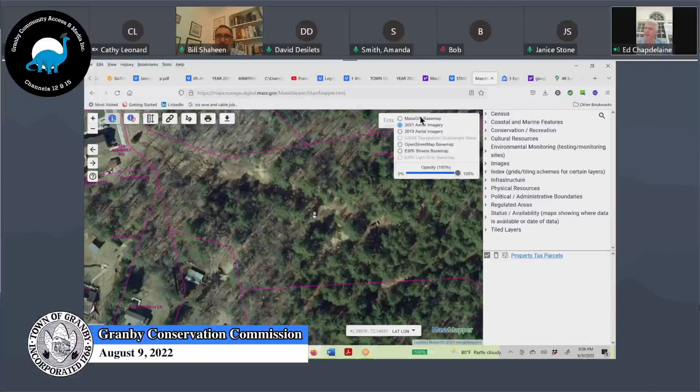They've got 3-meter contours, I think. I just want to make sure it's up on the high ground, which I think it is. Oh, it is, I already looked at all the contours and everything. It is, okay, yeah.

All right, I don't see any problem. I looked at all the historic topos all the way back to 1886, and even 1980, there's not even contours going through it. There's no drainage paths that could be passing through the property or near the property. Okay, so that's all intermittent streams.

Yeah, it's all pine, so it's probably sandy soil there. Okay, yep, all right. Personally, I don't see an issue. I agree with Ed.

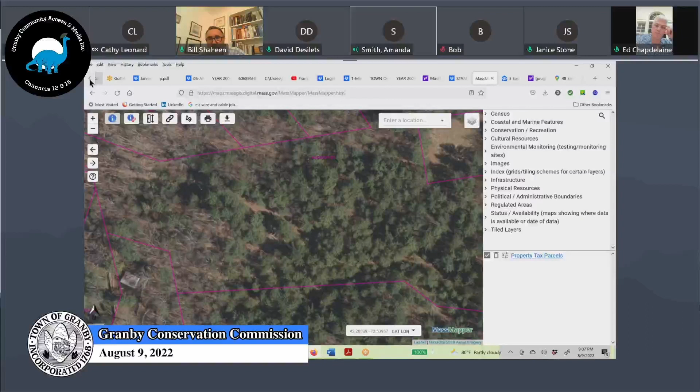I second that. Okay, so we're gonna approve this with no further action? Yep, I would say so. So I move we approve - what is it, 591 Amherst Road? That's 116 Amherst Road, no further action. I'll notify Briggs in the morning if we vote in the affirmative.

Do I hear a second? Second, Davis. All right, Ed. Any further discussion?

By the way, where's your leach field gonna go, Mr. Blanchard? What, the septic field, the leach field? Is it behind the house or in front, right house? It's gonna be behind the house, Bill. Okay, so the well's in the front, the leach field's in the back, okay.

Well, I've got South Hadley water. Yeah, you're on District 2's water. Oh, you are, okay, okay, this is basically showing the sketch of the house.

When are you presenting this to the health department? Already did - well, you gave it to Colleen, but we haven't acted on it yet. So we're gonna actually act on it. I don't know what else - yeah, next Tuesday we'll act on it in the Board of Health, okay, because I'm on both boards, okay.

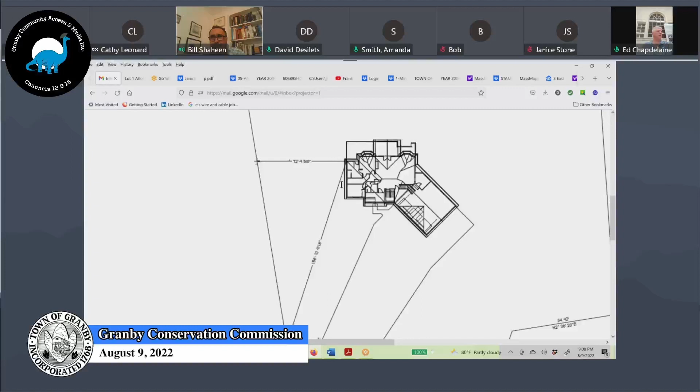All in favor of approving this, say aye. Aye. Aye. Opposed? Nothing heard, okay, you're all set. I'll talk to Mr. Briggs in the morning. Thank you. Awesome, thank you very much, everybody. You're welcome, take care, okay.

So now we are on to our new business, the Eversource MEPA filing - that's the expansion of the clear cut zone for the power lines, from 125 to 200 feet. Janice, you spoke with Ms. Hughes from DEP - she's not with DEP, she's MEPA, I think it is. Okay, so that's a separate agency.

And what was her opinion? She wanted us to contact Eversource for any particular questions, or she was accepting comments for them so they'd know areas they needed to prepare for. But she did say they would also be coming to each town with necessary permitting, because I suspect all the abutters are going to want the opportunity to express their opinion on the proposed clear cut expansion.

And I don't know how that's gonna work. I assume it may just be when they bring in the NOI to the ConCom that it'll happen. As an aside, on the Board of Health, the Board of Health's going to be asking them to provide information on herbicides and other chemicals to be used in the clear cutting.

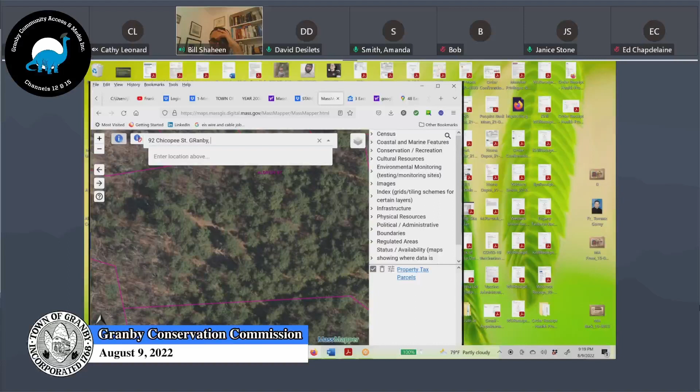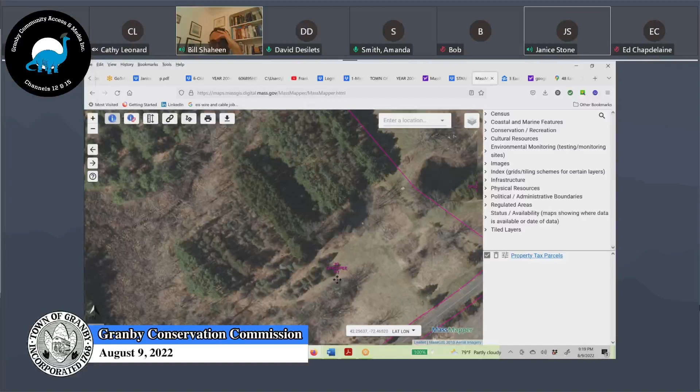So Janice, the last communication with Jerry Coder was he's going to pursue his operation with a permit from us or without a permit from us. He said if he had to, he'd do it without, he'd fight you for it. And I said, all right, well the commission may fight back. You shouldn't threaten commissions, that's kind of a stupid thing to do. Yeah, he's been doing his homework with the farm people and he believes he's on safe ground.

It depends on how close he is, that's all.

Hey Commissioner, this is Ed. My phone just went to 20% and into the red, so I'm going to be losing power in about 5 minutes.

We don't want to discuss, but again, I guess he could go forest cutting plan, Janice, to at least clear the place out. But after he does the forest cutting plan, he's probably going to have to file a permit going forward.

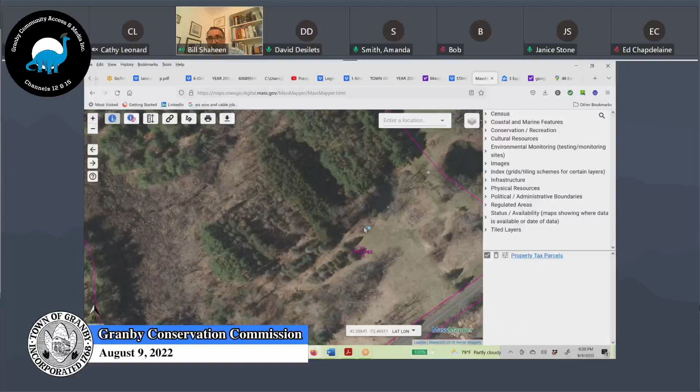Probably. But as Dave says, as long as he's planting all his little trees clearly greater than, say, 200 feet from any resource area, just to be super safe. Well again, he's got that Turkey Hill Brook, which we know is a cold water fishery, that's another issue in itself. But as long as he's several hundred feet from any resource area, he can clearly do what he wants.

But I'm seeing that depicted on the plan that Dave has in front of us. Is that Turkey Hill Brook, that little rivulet there? That's Turkey Hill Brook, and his property line basically follows it. Chicopee Street is right at the bottom of the screen. Oh, I see, I think he's within that 200 foot. Oh yeah, he definitely is, from that brook to the edge of the street is 200 feet.

So that means that is verboten right off the bat, right there. Yeah, okay, all right.

Anyway, but again, once we got an NOI, if he went that route, he would then be able to do the agricultural exemptions moving forward. It's just when you start a new operation, you need a permit. After that, you have the agricultural exemptions to rely on. So you need a permit up front, and then you can go on your 5-year windows forevermore. I got you, okay.

Well, he wouldn't even have to come back. But if he was out of operation for a period greater than 5 years, he'd have to go back to square one. But as long as he doesn't have a period where he's not doing anything in a 5-year window, he's good to go.

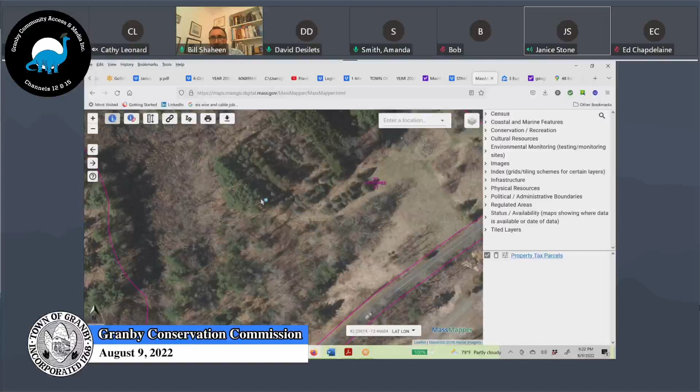Okay, the only thing, I think we have to pay Janice. Oh, and yes, Emily. Well, we got to go through the payments for Janice and Emily. And what about the application procedures? Oh, Dave, why don't you rattle through the bills, please?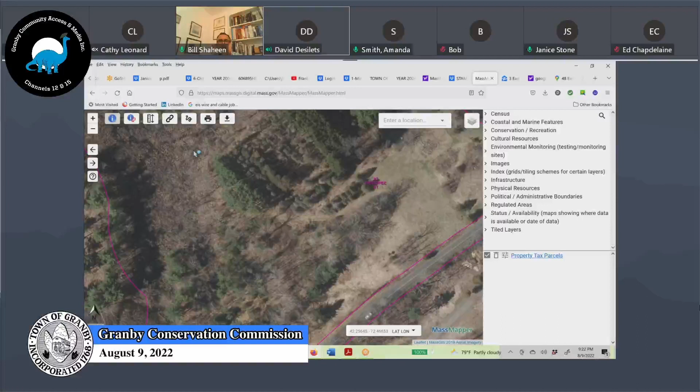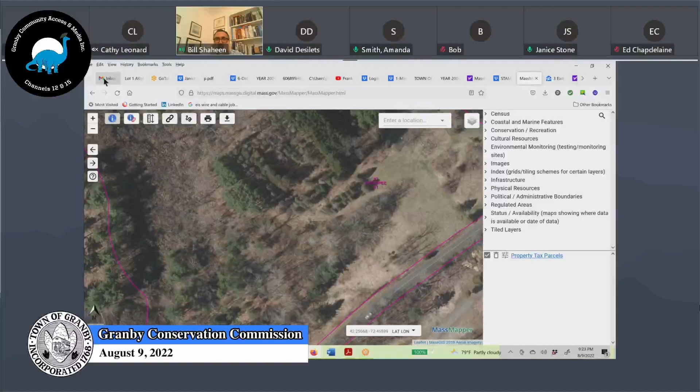The Janice Stone bills you're talking about for July? Yes, two. And Janice Emily Stone bills, the telephone and her time, and Emily Stockman from January. All right, let me find them. You sent them out, Janice? Yes, I think it was this morning or last night.